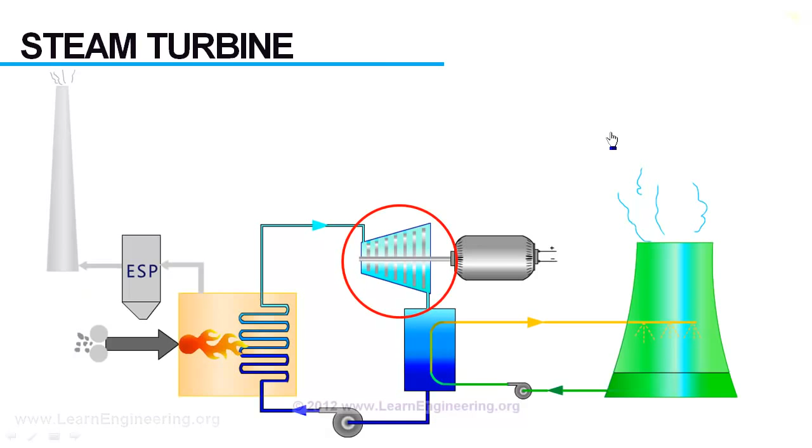In today's video, we will understand the working principle behind a steam turbine. Steam turbines are considered the heart of the power plant, because this is the device which converts thermal energy from fluid to mechanical energy, more precisely as rotational energy of these rotors. So a series of such rotors, which absorb the fluid energy by virtue of its rotation, are the most vital component of a steam turbine.

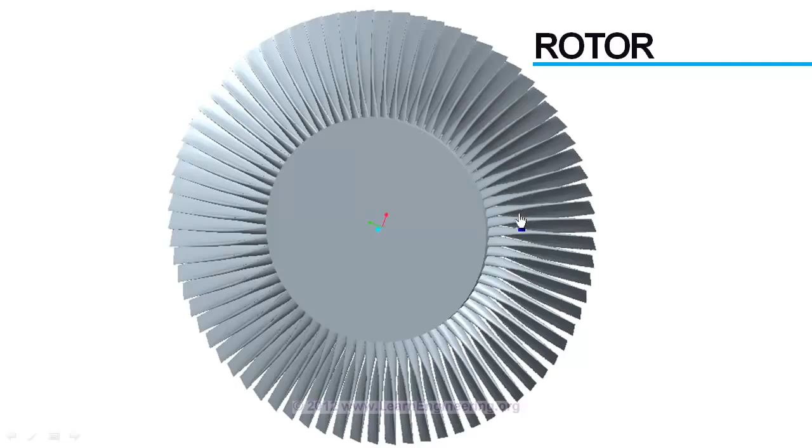Let's have a close look at one of such rotor sets, in order to understand more about its working. Here it is. This is one rotor set, and you can see there are series of blades connected to the hub of the rotor. In different orientations it will look like this, or like this.

If you take a close look at one of such blades, you can observe one thing. This blade is a collection of different airfoil cross-sections set together, which vary in size and shape from bottom to top.

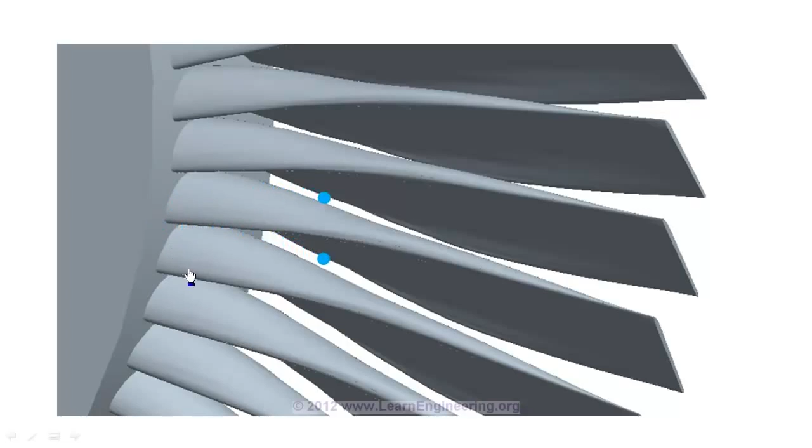When high-energy steam at inlet, with high pressure and temperature, flows over such a blade, it will induce a pressure above and below the blade. Thanks to the special shape of the blade, the pressure above will always be less than the pressure below. So there will be a resultant net force acting in the upward direction. This force will make the blade rotate, in this manner. As the blade rotates, it obviously absorbs some energy from the fluid, so fluid at exit will have lesser energy compared to inlet. In the coming session we will see how we can predict the energy transfer in fluid.

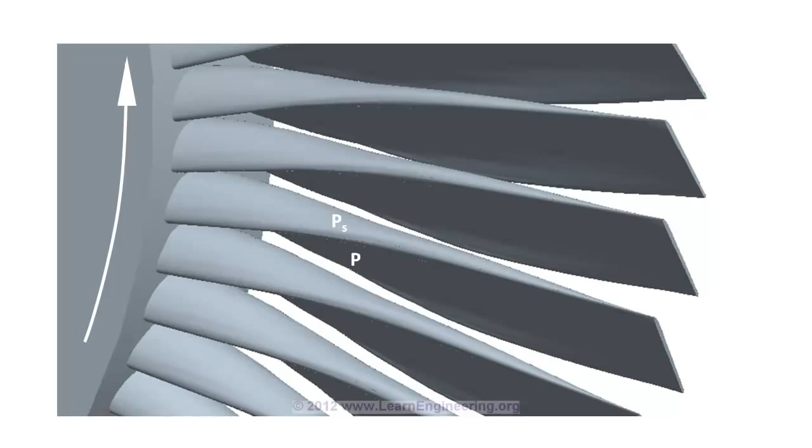But before moving to that, we will have a brief look at the energy associated with a flowing fluid.

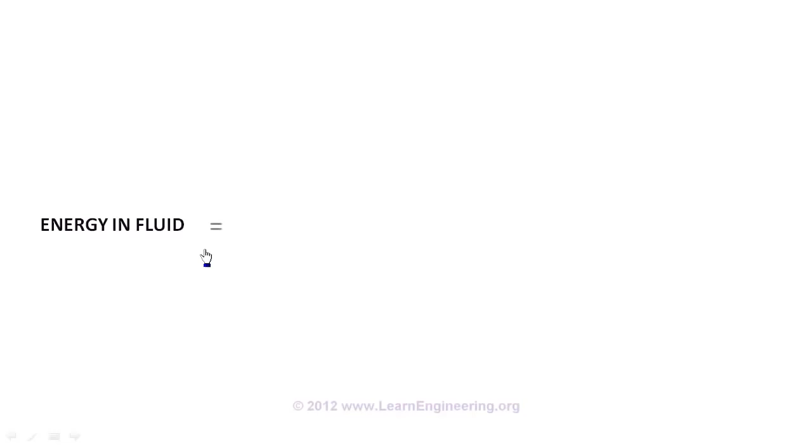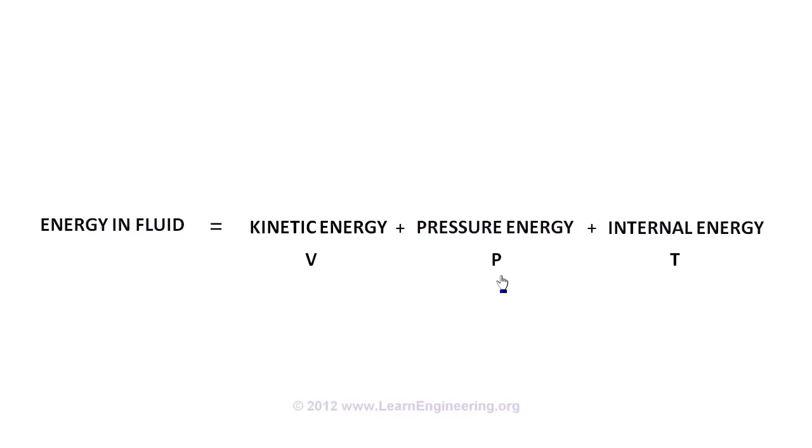There can be three components of energy for a fluid. First, due to its velocity, the kinetic energy part. Second, by virtue of its pressure, the pressure energy. Third component, by virtue of its temperature, the internal energy. The last two components, pressure and internal energy, can be combinedly called enthalpy. If a fluid has a high enthalpy value, it means it has high pressure and temperature.

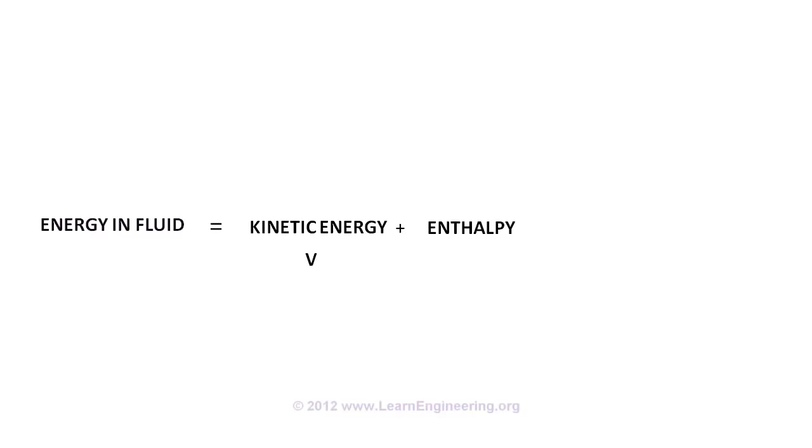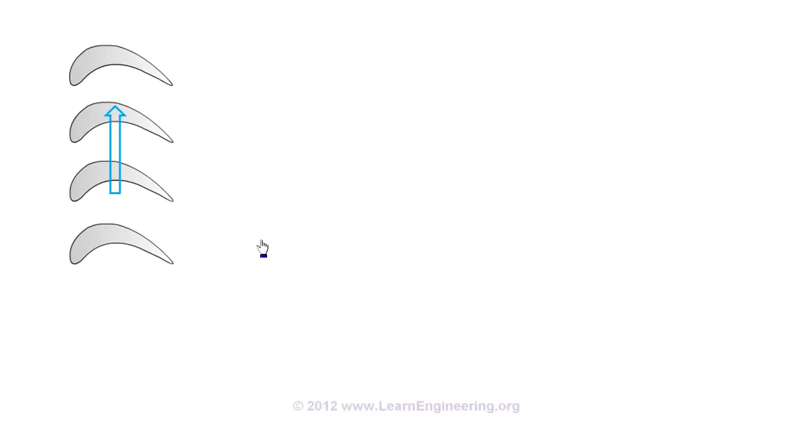Now we will see exactly how a steam turbine absorbs energy from steam. This is the rotor cross-section of a blade, at a particular length. As the steam passes over, the blade will rotate in this direction, and this will result in energy loss to the fluid. For a typical steam turbine, both kinetic energy and enthalpy come down.

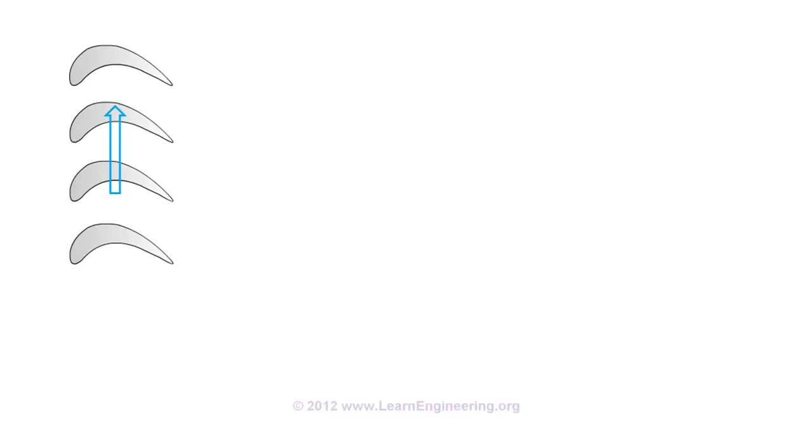So if you plot velocity of steam from inlet to outlet, it will look like this. As kinetic energy decreases, velocity decreases. Similarly, enthalpy also decreases, like this.

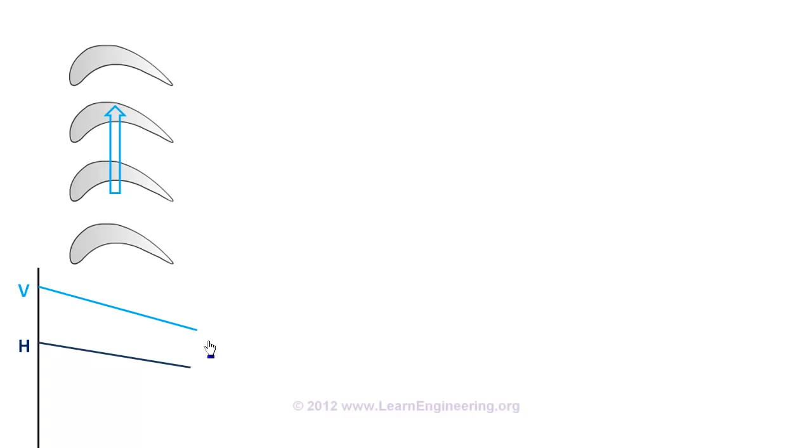Now the next step is to pass this steam to the next stage of rotors. But if you directly pass steam to another set of rotors, it won't absorb much energy, because the velocity of steam is already very low. So before passing the steam to the next rotor, you should increase the velocity first.

For that, we will use something called a nozzle, a stationary device attached to the casing of the turbine. They are also called stators. Stators are also a set of blades, but these blades are stationary. They won't take part in energy transfer. What they do is simply transform energy from one form to another, or more precisely, transform enthalpy energy into kinetic energy.

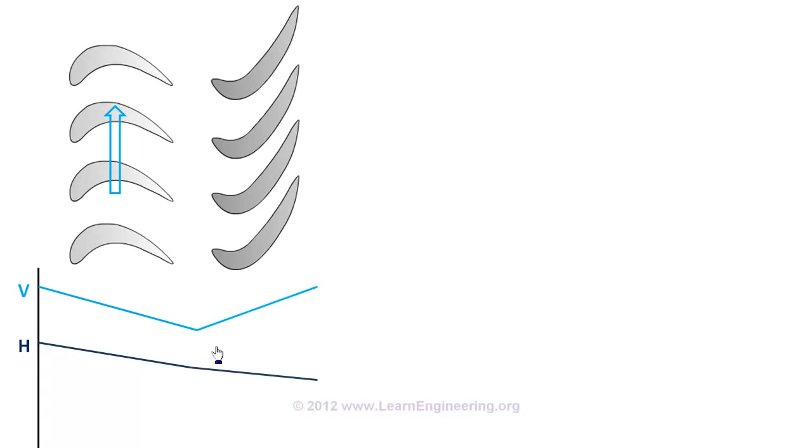You can see the cross-section area of the nozzle decreases with flow, so due to its special shape the velocity increases, but at the same time enthalpy decreases. If you sum the change in enthalpy and kinetic energy, there won't be any change.

Now we have increased the velocity of the fluid, so we can put the next set of rotor. Again stator, and again rotor. So in a steam turbine there will be alternating sets of such rotors and stators: rotors which are moving, attached to the hub, and stators which are stationary, attached to the casing of the turbine.

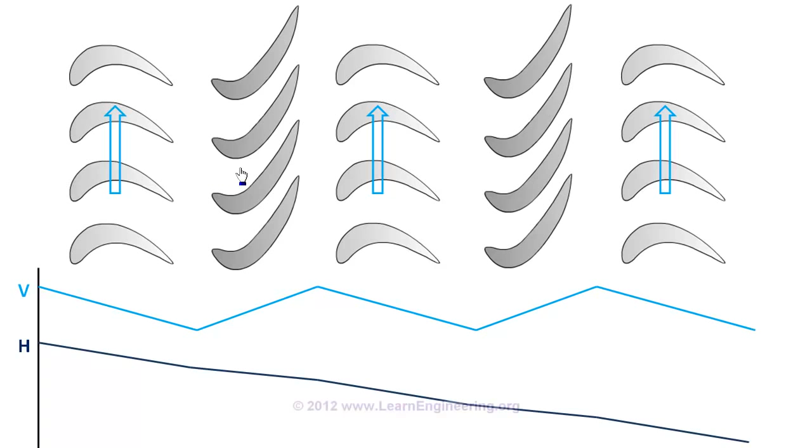Now we will have a close look at energy transfer at the rotor. If you sum kinetic energy and enthalpy energy change across the rotor, you will get the total energy transferred. What could be the contribution of each of these terms? Is it possible that enthalpy energy change is zero, yet the kinetic energy part still contributes to the energy transfer, or vice versa?

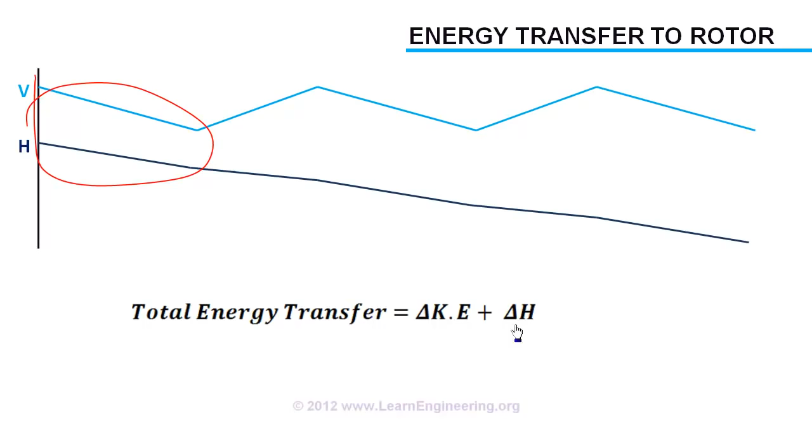This is defined in a term called degree of reaction, which is defined like this. So the value of degree of reaction could vary from 0 to 1.

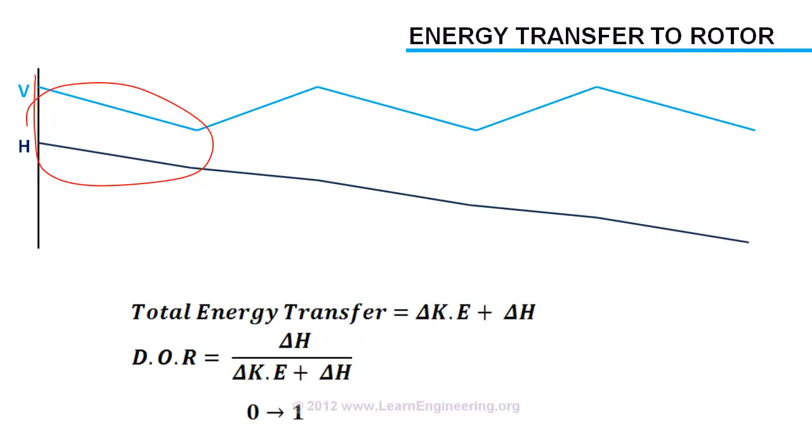Suppose for a turbine the degree of reaction is 0, then such turbines will be known as impulse turbines, or 0% reaction turbines. In such cases, enthalpy energy change across the rotor will be 0, and energy transfer will be purely due to kinetic energy change.

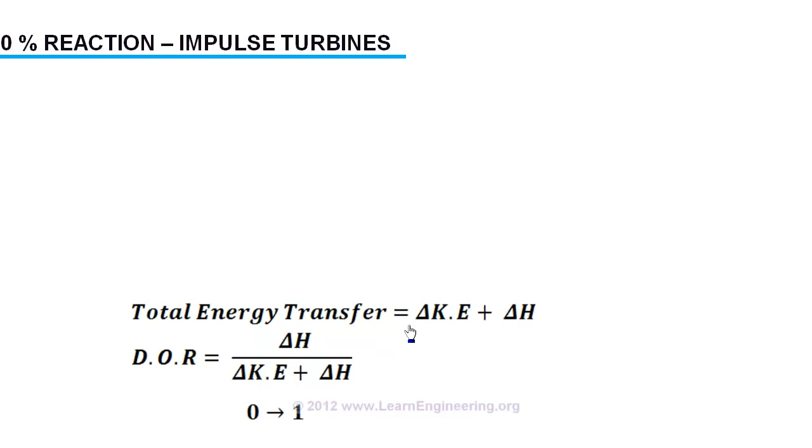We know along the blade enthalpy doesn't change. Along with enthalpy, temperature will also remain the same, because enthalpy is a direct function of temperature, assuming steam as an ideal gas. There will be a slight drop in pressure, but you can almost assume pressure is the same across the rotor. The only quantity which changes here is the velocity.

Here fluid passes through the blade without actually hitting it. We know across the blade there is no kinetic energy change, so the absolute value of velocity remains the same across the blade, but pressure, temperature and enthalpy vary across the blade.

A practical steam turbine will be a compromise of these two cases. People usually use a 50% reaction turbine, known as a Parsons turbine.

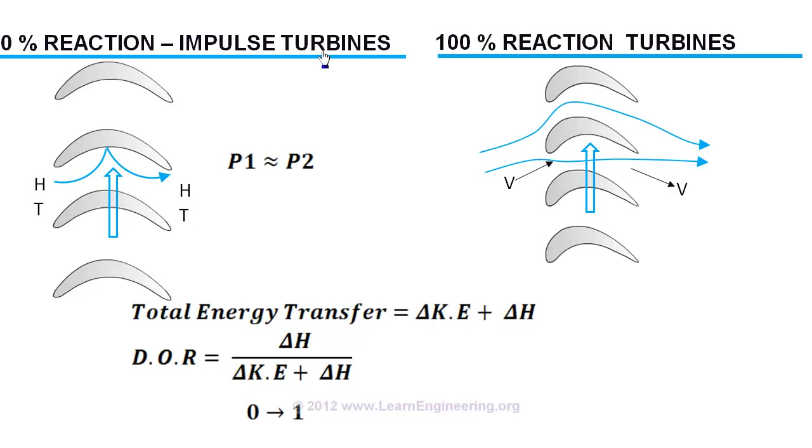That is all about the working of steam turbines. Thank you for watching the video.